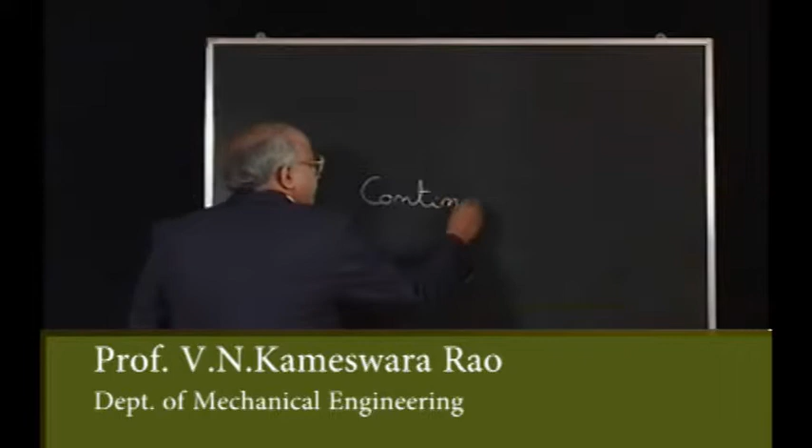In this lecture, we discuss the description of fluid flow. The fundamental assumption that we make as far as the type of fluid flow is that the fluid is continuous. That is what we call the concept of continuum. The concept of continuum of a fluid tells us that there are no cracks, fissures, or openings in a fluid.

If you take any point in space in a fluid flow, at every point we can describe the characteristic properties of the fluid at that location as continuous functions. That means at every location in space there exists a particle, a fluid particle, which consists of enough molecules whose average characteristic property is represented as the property of the fluid itself. That means in a fluid, everywhere there are particles; there are no gaps or fissures. That is what we call the concept of continuum.

We also make another assumption that the fluid is isotropic. That means at one location the characteristics are the same in all directions. With this, let us look at how we describe a fluid flow. Let us take one simple example. There is a fluid flow like this, and at one location the velocity of the fluid is measured as 1.5 meters per second.

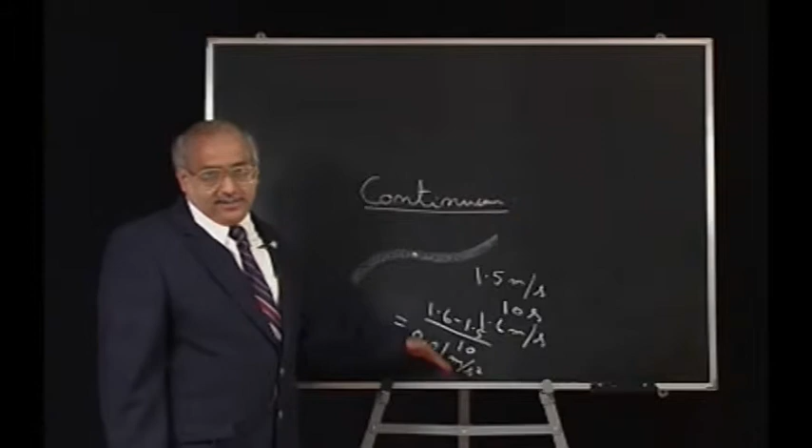Friends, let us analyze this problem with a different outlook. Do we agree that 0.01 meters per second square is the acceleration of the fluid? The answer is no, certainly not. The acceleration of the fluid is the rate of change of velocity of the same fluid particle. In the first instant we have a fluid particle at that location whose velocity is measured by a probe, a pitot tube let us say, as 1.5 meters per second.

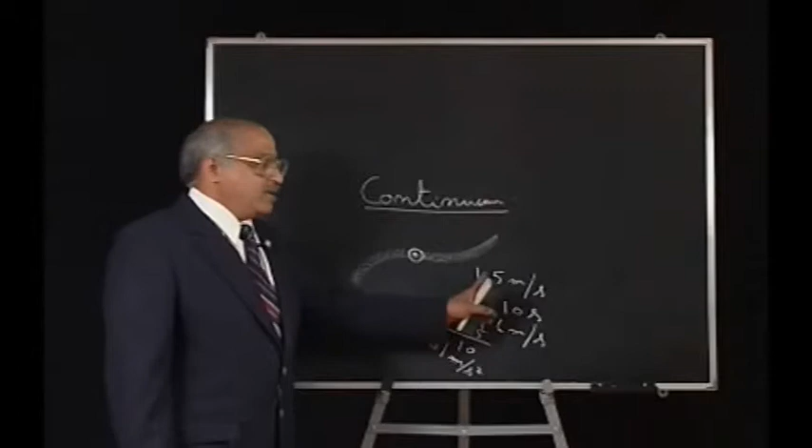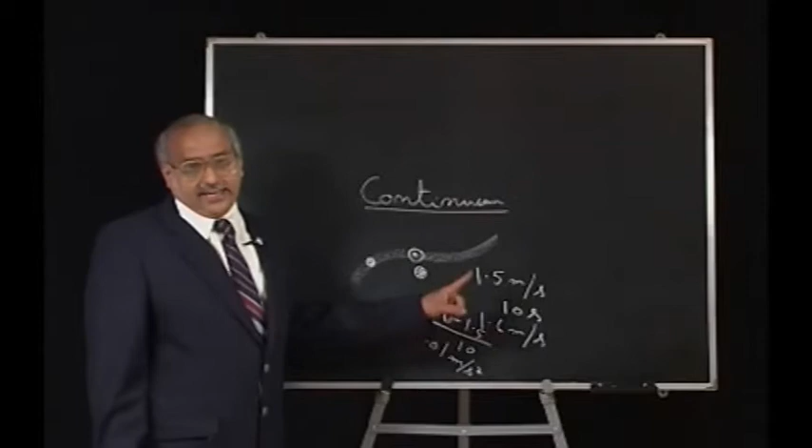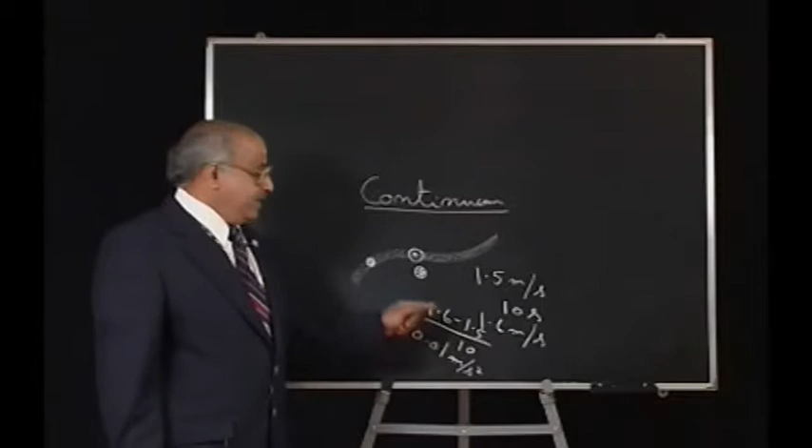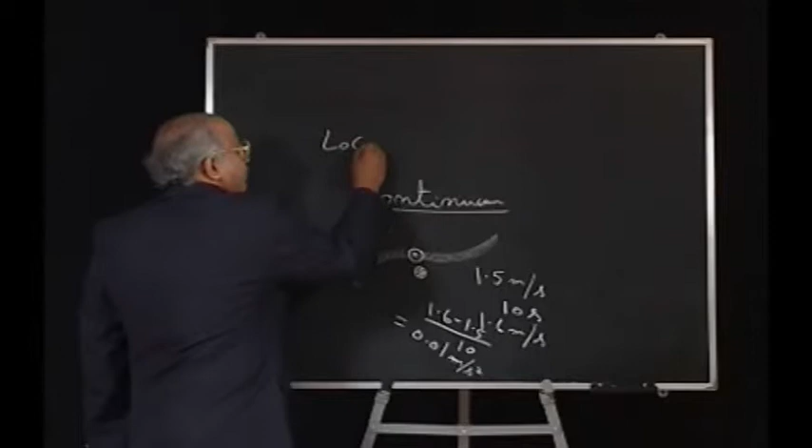In the second instant another fluid particle, which was previously here, has reached this location. So 1.6 meters per second is the velocity of the second particle at the second time. So this difference of 1.6 minus 1.5 meters per second in 10 seconds is the change of velocity at this location of two different particles at different times. Mathematically, this difference is called the local rate, represented by the symbol ∂/∂t.

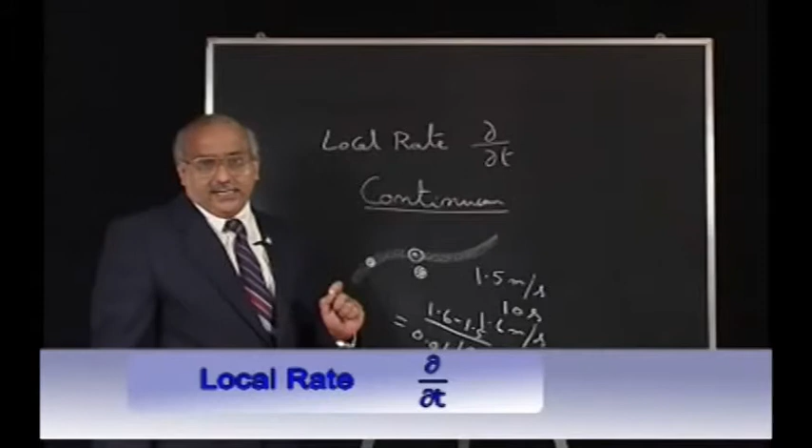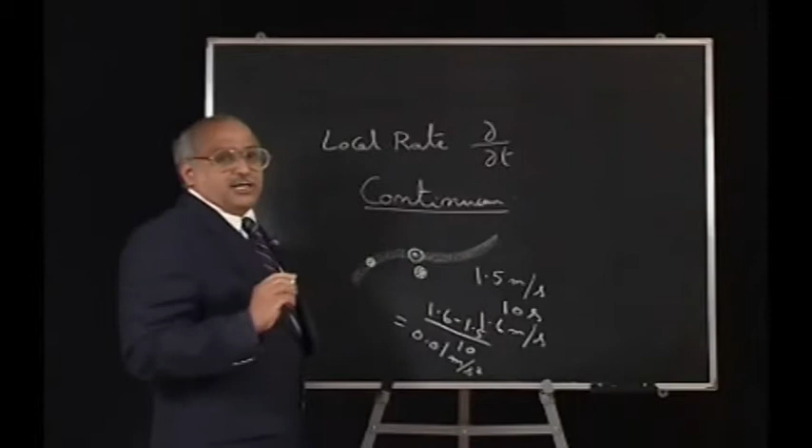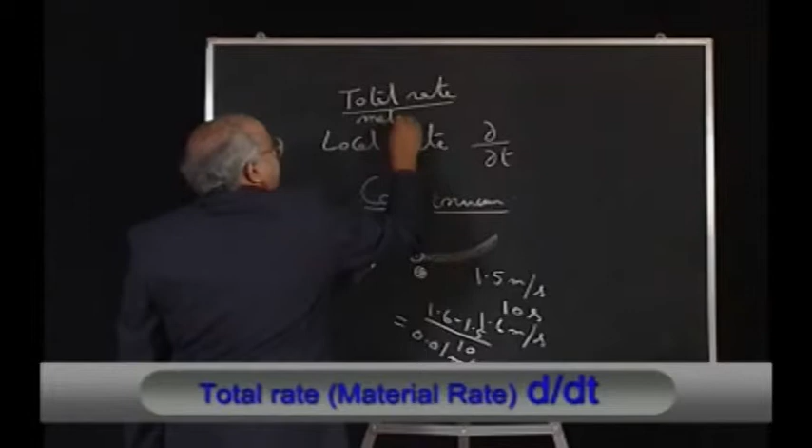Wherever we use the symbol ∂/∂t, it means the change of a property at a location of different particles. On the other hand, what we really require is the rate of change of velocity of the same particle at different times. So let us define that rate as the total rate, which is also called the material rate and the substantial rate, represented by the symbol d/dt.

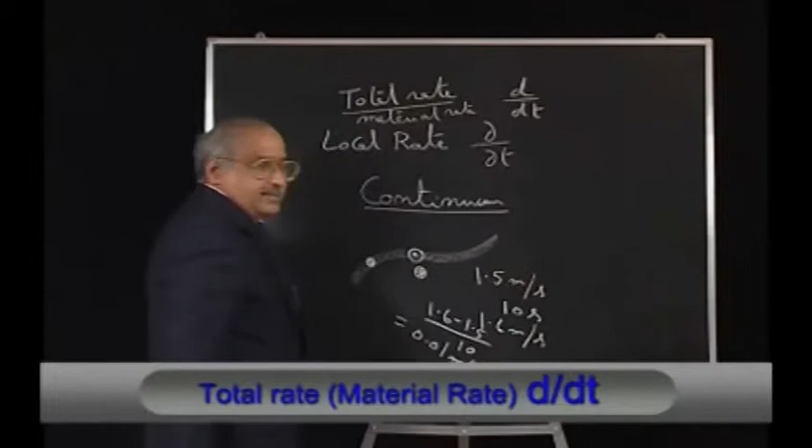Our inability to identify a single fluid particle and follow it to get its velocity at different time intervals forces us to select one location and measure the velocity of different fluid particles at different times. That means we are measuring the local rate only. We cannot directly measure the total rate of change of any property, be it velocity, temperature, or pressure.

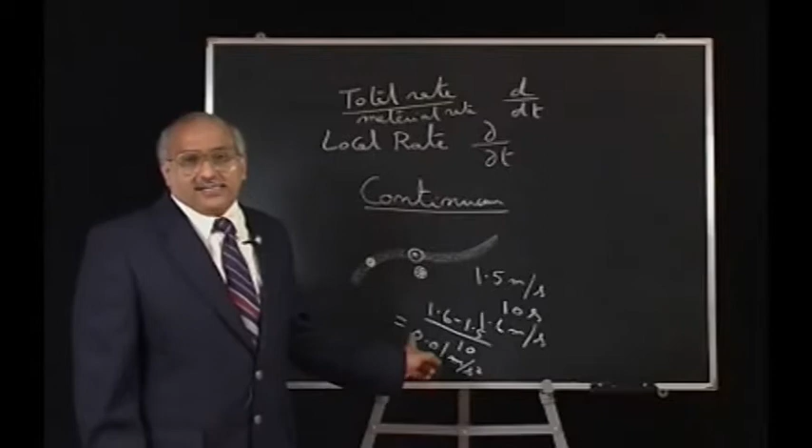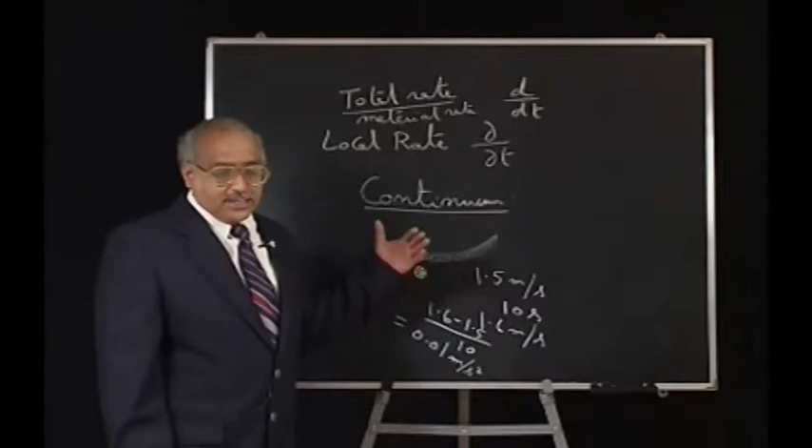So the analysis of fluid flow is different from that of a solid. In the case of a solid, you can attach a speedometer, travel along with it, and record the speed or velocity. We can't have such a facility in fluid flow. That's why the analysis of fluid flow is totally different from the analysis of solid motion. We take what is called a control volume.

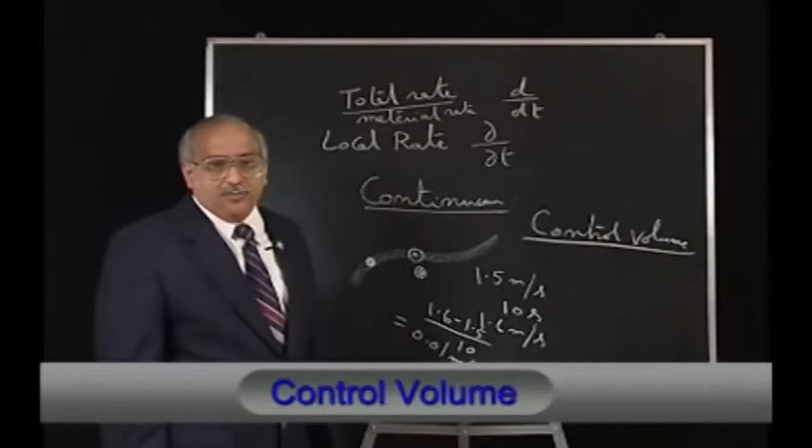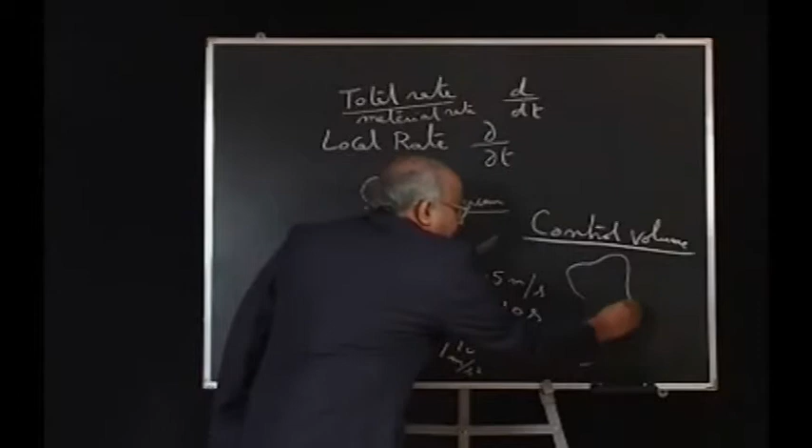A control volume is a fixed volume in space; that is our region of interest. We select a control volume which has several openings, so flow can enter and leave this volume. The property transported through this control volume can be mass, momentum, or energy. Whatever the nature of transport, our region of interest is this control volume, wherein something enters and something leaves.

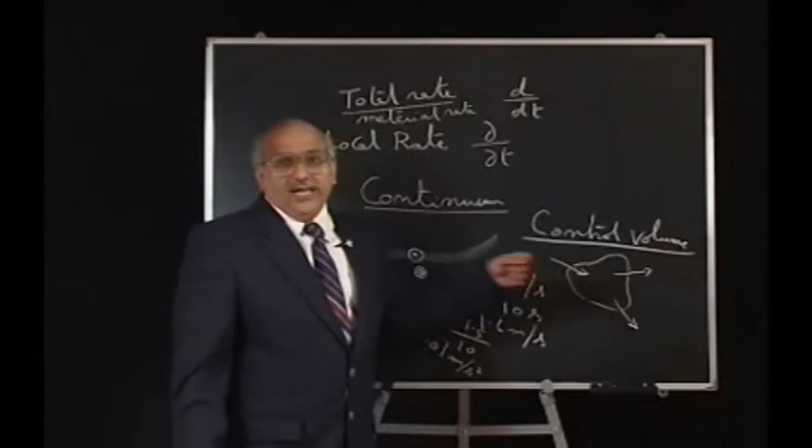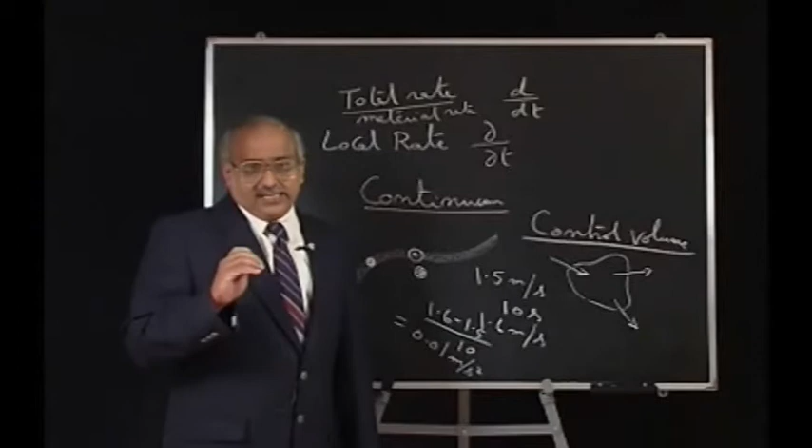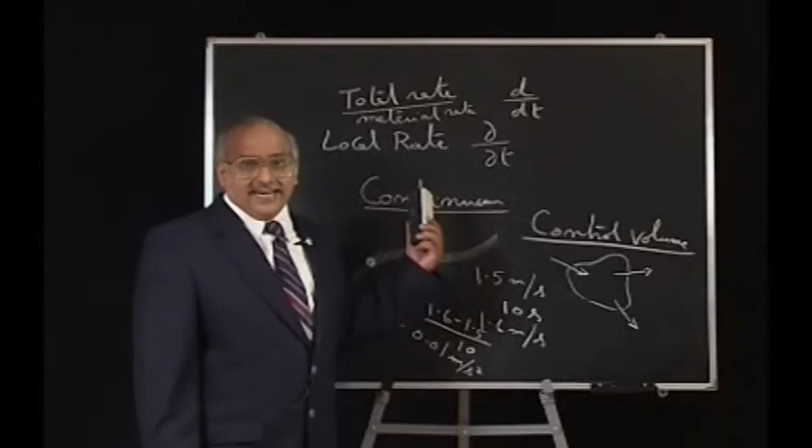So we measure the local rate of change of that property of the fluid within the control volume, and then try to get the total rate from these measured local rates. Actually, we can have two kinds of properties. A characteristic property of a fluid which includes the mass of that body is called an extensive property, whereas a property defined per unit mass of the fluid is called an intensive or intrinsic property.

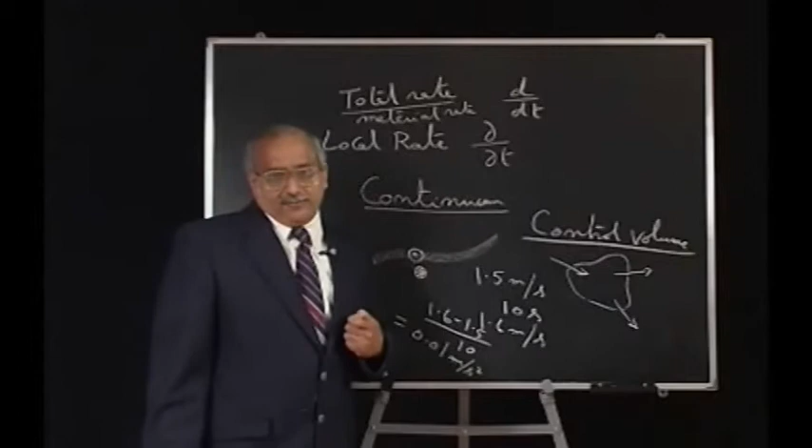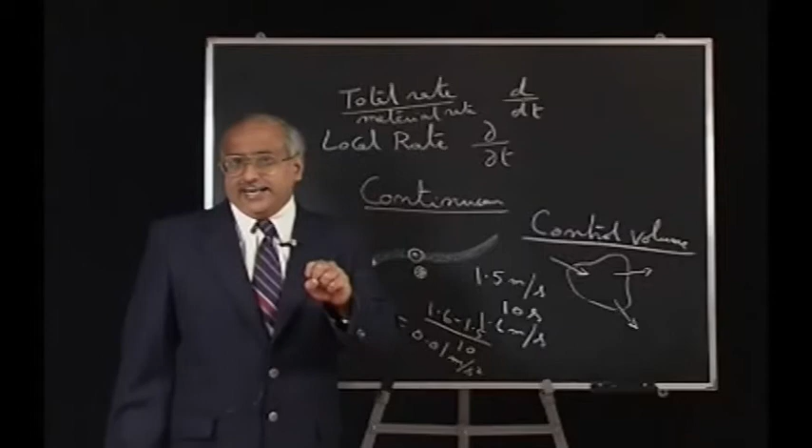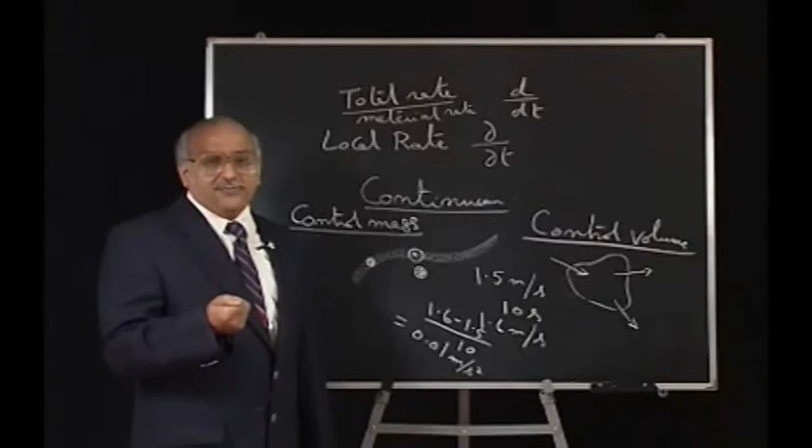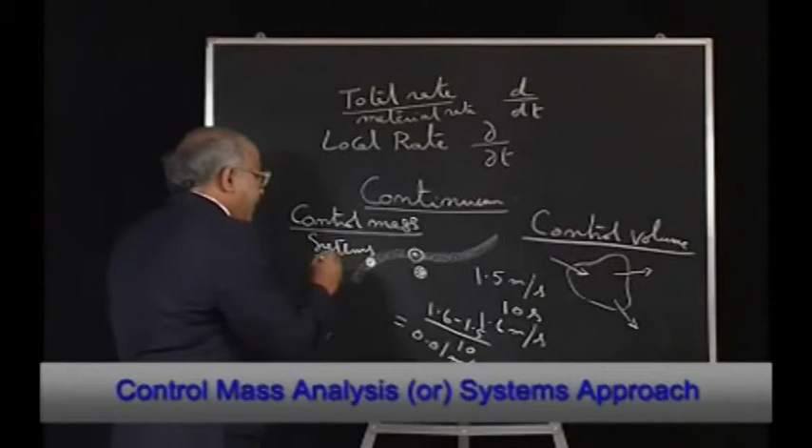So in control volume analysis, what we are really studying is the property per unit mass of the fluid; a fixed mass of a body is not our study. If you take a fixed mass of fluid and study it, which is difficult in fluid flow, such an analysis is called control mass analysis, which involves a fixed mass that remains constant. Control mass analysis is also called a systems approach. In fluid flow, what we do is a control volume analysis.

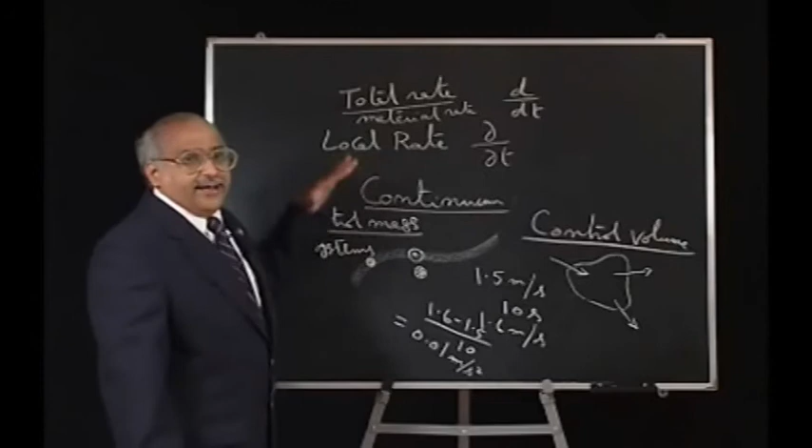Now that we have defined the two kinds of analysis, let us first go to control volume analysis. In this example, we have taken a location instead of a volume. The whole job of fluid flow analysis is to convert the local rate of change of properties to the total rate of change of properties, so that the total rates can be used to describe the dynamics of fluid flow.